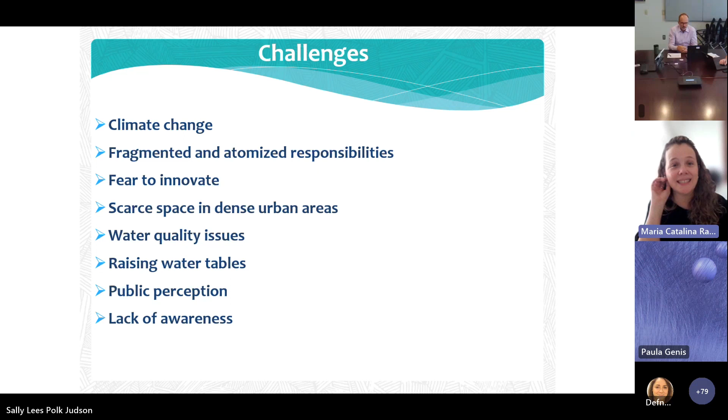That's where the original creek comes from - it's the Arroyo Cildáñez. During a mission, they told us they were going to finance this under the project, but we saw this huge park next to it. So the bank team included some experts at the time, and they asked: why don't you assess the opportunity to use some retention areas, so you don't have to increase the existing capacity of the pipe so much? It became compulsory, an agreement during the mission, that they had to at least assess that opportunity.

And they saw that technically it made sense. They actually didn't have to increase the capacity of the Cildáñez that much if they built this big retention area in an existing public space.

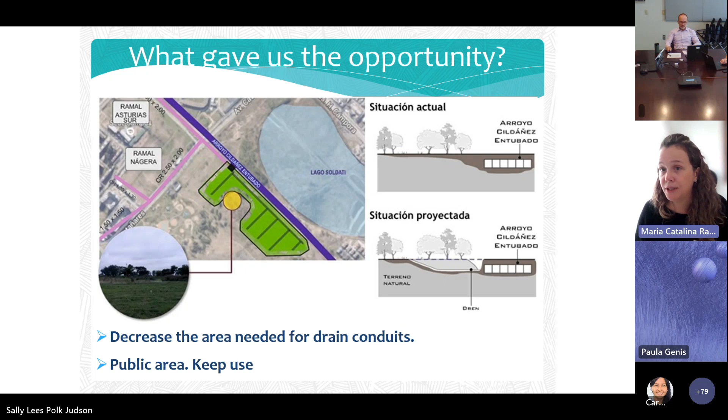Actually, it was consulted as one big system. All the documents - the design, the environmental impact assessment, the social assessment, and all the public consultations - were done for this system. It was not only the retention area, but the whole drainage system. And it actually came out very positive. People just requested that the area be maintained dry so they could have soccer fields if they wanted to use this area.

This is a picture of how it looked. You don't see a lot of neighbors around it - it's just a big public space. It wasn't used at that time for any sport or any particular activity.

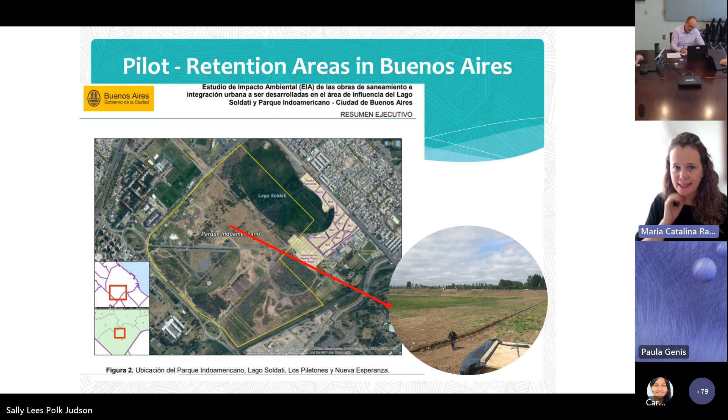When digging the area, they realized that the water table was higher - this is a very big issue here in the City of Buenos Aires. So they had to build a pumping station to keep this space very dry. This series of pictures shows how it looked in 2012, before the project.

This is when they decided to prepare the area. Works started, and in the upper part of the pictures, this pumping station was going to be installed. This is how it ended.

So COVID hit, and we all had been stranded in our houses. When the government officials handling this contract for this area went there 7 or 8 months after COVID hit, they actually saw there was water there. The pump motors were stolen, and water was coming into the reservoir.

Well, people had already started going to the park because you no longer needed to stay at home. And they actually said, we would like it better like this. So nature took over.

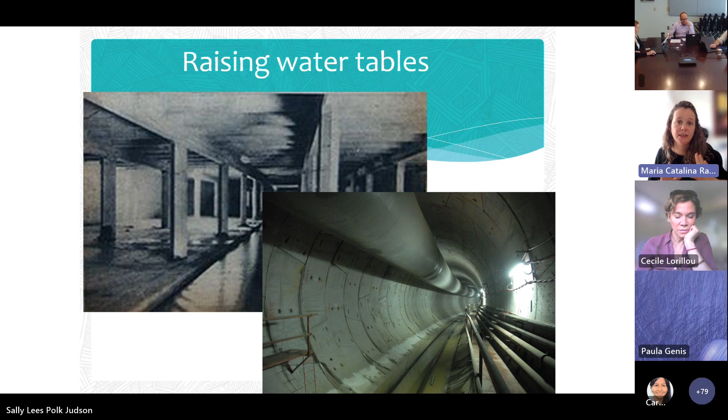So the first picture was what was built in the 30s, and this is what was built under this project.

So one of the lessons learned here is that you need to take opportunities and put these nature-based solution investments within a larger setting. Otherwise, I think the discussion becomes too centered on whether to leave one tree or change a park, and it's really difficult in that discussion. But if you present a larger picture and explain that this is going to work together with something else, I think it's easier for people to understand.

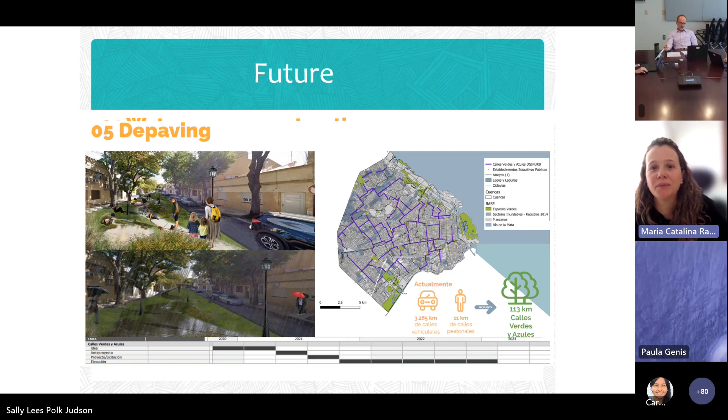They're also trying to depave some streets, among all the pilots they want. So I think that was all that I wanted to say. Hopefully there are some questions I can respond to. Thank you.

Thank you very much, Catalina. Fascinating. Just want to make one precision. I'm not old enough to have been part of the first 97 flood project, but I have been following this over the years, especially when I was still in LAC. And it's fascinating to see how it's basically 30 years of bank engagement that has, of course, evolved over time, and where it's now maybe even changing how the city thinks of its own urban planning, its own urban fabric, and itself as a city, and how the city attracts people.

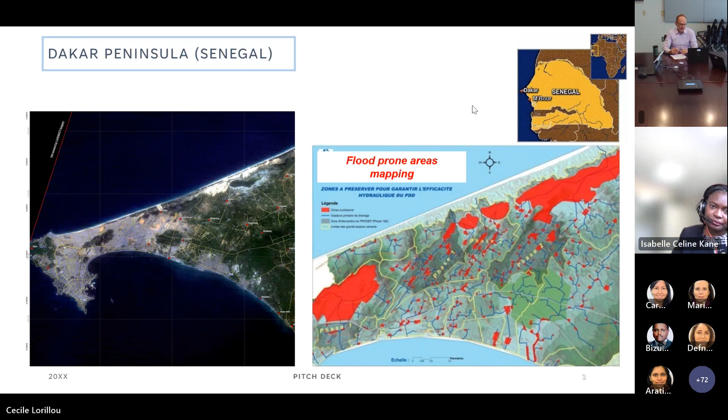As you can see here, the recent floods the city experienced were in 2020, with 150,000 people affected and more than 10,000 houses destroyed. And in 2022 or so, the city was also affected. This happened every 2 to 3 years since 2005.

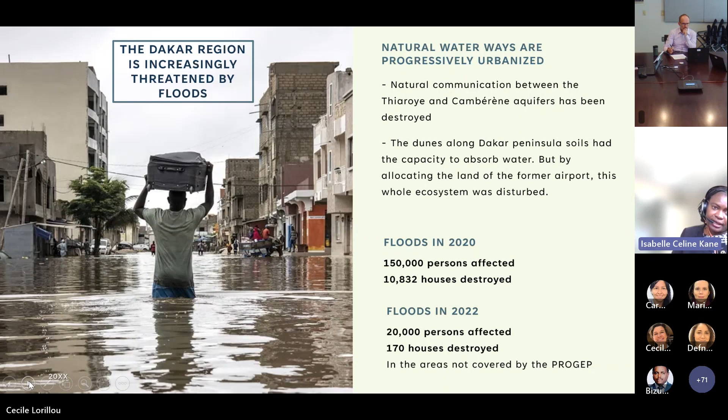From 2012, the bank, through a project named Stormwater Management and Climate Change Adaptation Project, started supporting the government in finding sustainable and integrated solutions to this urban flooding. First, between 2012 and 2021, for 121 million in IDA funding. After that, a follow-up project, Project 2, was approved in 2021.

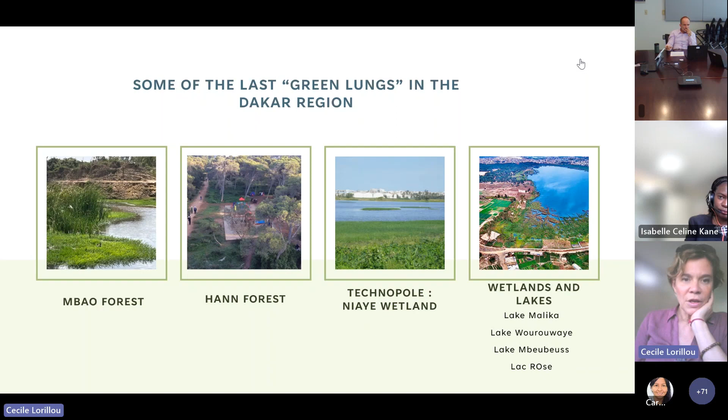So the nature-based solutions promoted through the projects are described here: open green spaces, urban forest, urban farming, and wetlands.

We will first talk about the wetland of Niayes Pikine. It's called the Technopole, because there was a plan at some point to build a Technopole here, which was dropped by the government. Nowadays, the idea is to protect this area, which is very rich in biodiversity, from other candidates for urban development on this wetland.

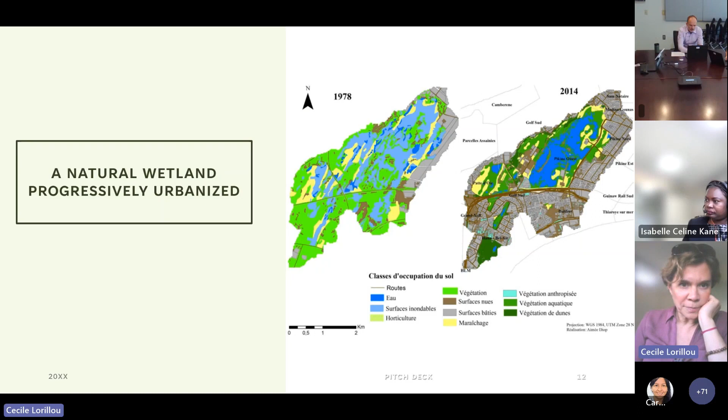In the Dalifort neighborhood, south of the Niayes Pikine wetland, there have been several episodes of extremely serious flooding. The project helped solve the drainage infrastructure issue, which was pouring water toward the wetland and the road separating the wetland from the neighborhood. The ill-engineered drainage system was really threatening the neighborhood, the sewage treatment plant, the road, and the wetland itself.

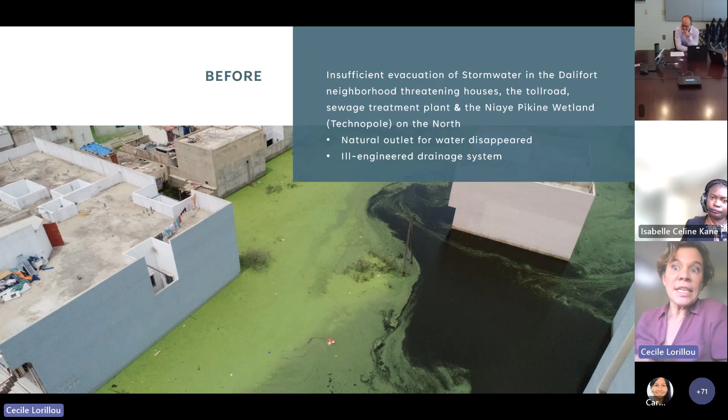The project helped redirect the drainage water and installed a valve system so that the outlet now drains water to the sea, protecting the wetland. The valves help keep enough water in the wetland while evacuating all the stormwater to the sea.

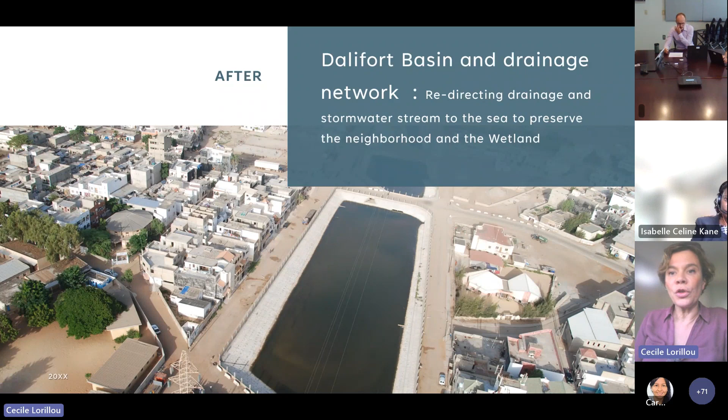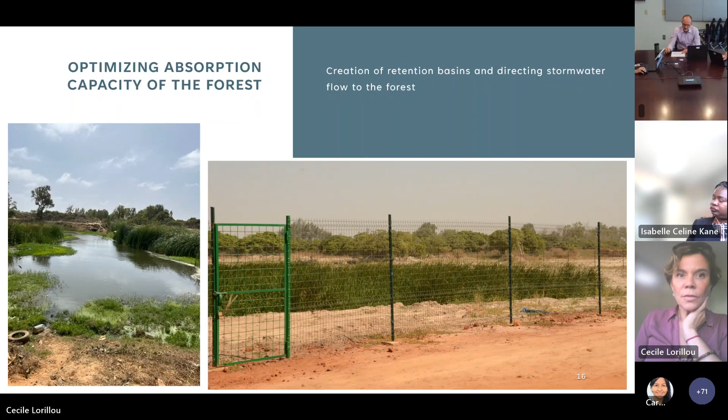The second example is the Mbao forest. The project is trying to use the existing natural land to restore the absorptive capacity of the soil, so several retention basins were secured and created in the Mbao forest.

One of the main advantages of this project was that it worked in synergy with local farmers who needed access to water. Through collaboration and consultation, the project is installing a solar water pump for the farmers, in addition to other development within the Mbao forest currently underway by the government, which will also help citizens use the forest.

As for now, the forest is still isolated and not necessarily used as it could be, as people haven't been incentivized to use this forest as a leisure area.

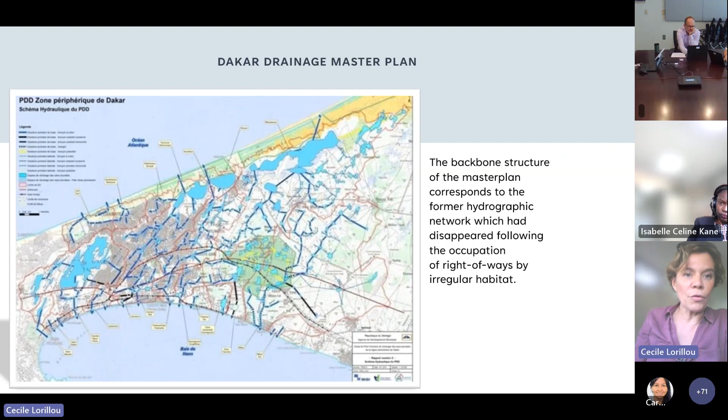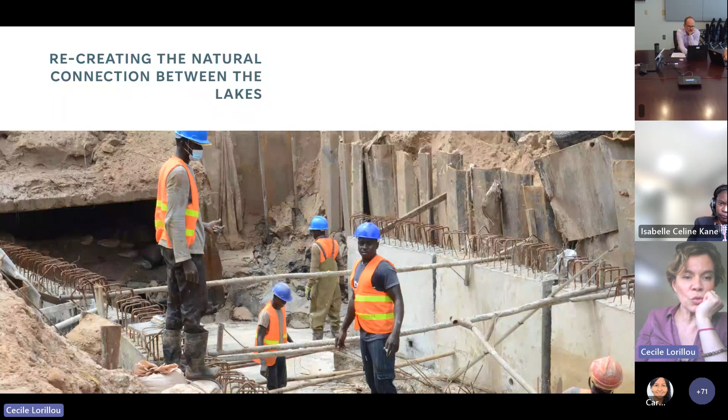The plan aimed, as far as possible, to avoid pumps and instead use a gravitational network. As you can see on the map, there has been an effort to reconnect the lakes and use the outlet to the sea, so the project would help restore the natural pathway of the water. Here is an example of the works conducted to reconnect the lakes.

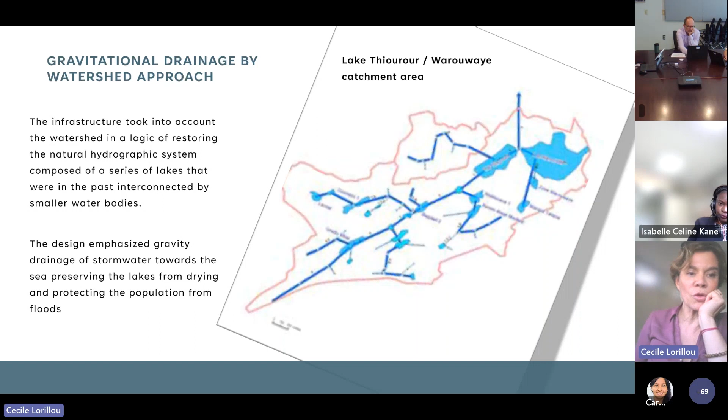In the project, we wanted to use gravitational drainage and a watershed approach. The design emphasized gravity drainage of stormwater, but also included a system of valves that would prevent lakes from drying while protecting the population from floods.

One of the challenges was that we were planning to install public amenities and several nature-based solutions around the lake, which was initially planned in the PROGEP 2 framework.

However, within 2 years, because the project helped solve the flood risk, urban development became much more prominent in this zone, precisely because it was now protected. In a matter of 2 years, the zone where nature-based solutions were planned became urbanized. So when we say that urbanization in Dakar is happening at an extremely fast rate, this is one example.

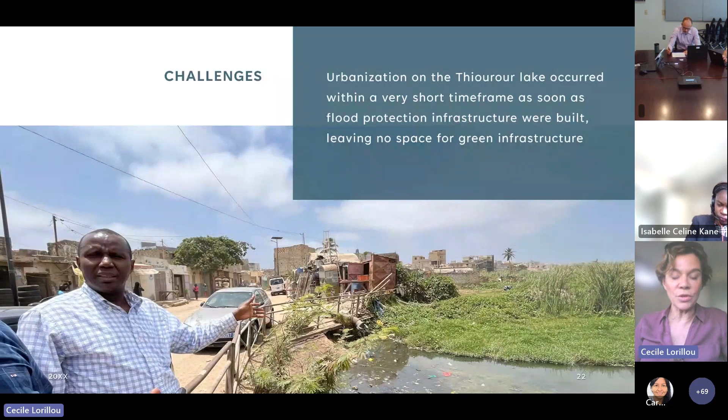About other NBS initiatives, more common here, we wanted to present the example of the urban pole of Diamniadio. Diamniadio is a flagship project of the Dakar region authorities, a new developing city of 2,000 hectares, about 30 kilometers east of Dakar.

This pole has been developed because of the forecasted demographic boom, and the land has been liberated, notably because of the relocation of administrative activity. For the project, the idea was to defend a space where a park would be installed, despite competing priorities such as the university, a convention center, offices, or commercial facilities.

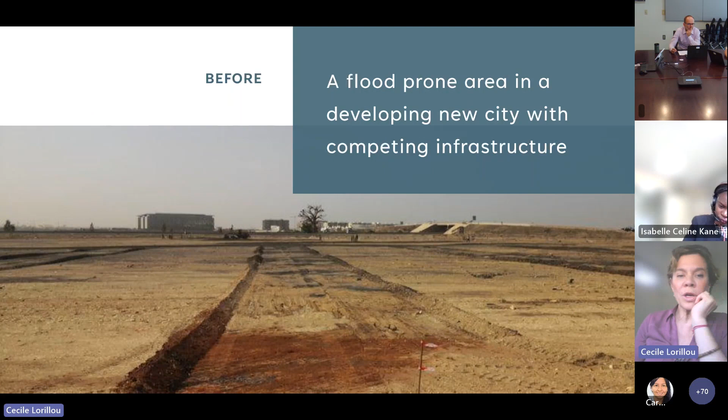I won't go into details, but there has been much conversation and negotiation with developers to secure land in the Diamniadio area to create a park. This is what the land looked like before, and the project allowed the creation of the Emergence Park.

For those interested, there has been very interesting work on local species of trees and plants that would resist drought and the specific conditions of the region. I won't go into detail, but if you're interested, we have the reports.

One of the challenges for this park was really the problem of maintenance and the lack of resources to maintain this newly created green space.

Another example is this retention basin that was formerly not developed, and where we collaborated with the population around to plant the basin and create public amenities so that people would appropriate the zone and also would accept it.

As you can see, most of our retention basins are closed, to protect from drowning and from dumping of solid waste. But when you develop public amenities around the retention basin while preserving the visibility of the water, you can still use the basin as a leisure area, even though it is closed and access is closed for the public.